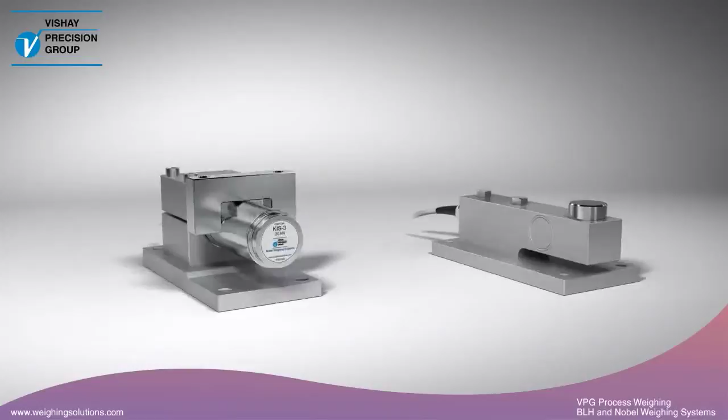The shear force strain gauge load cell has become the main component in most industrial vessel weighing systems. Understandably, these simple devices are often regarded as commodity items, with little to differentiate one from another. However, a different story lies behind the spec sheet information. This presentation explains why.

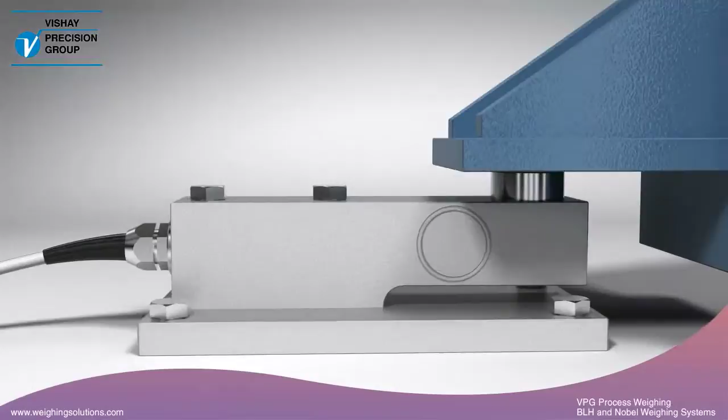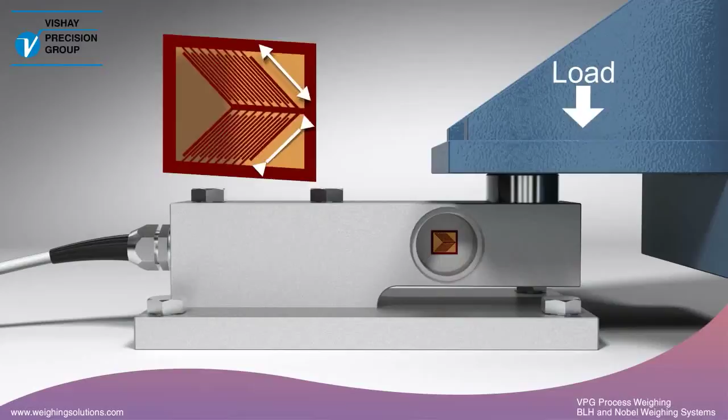Simple shear force load cells were developed for use in weighing platforms and have strain gauges bonded to a web located inside a cavity. There are usually 4 strain gauges, 2 seen here and 2 mounted on the far side. They are stretched or compressed as the web is sheared by the load. The gauges are designed to measure the shear strains in the web.

In a simple shear beam, there are also bending strains present, which contribute to the output. Under laboratory conditions, the bending effects, though present, are small in comparison to the applied load, and thus do not adversely affect the accuracy of the load cell.

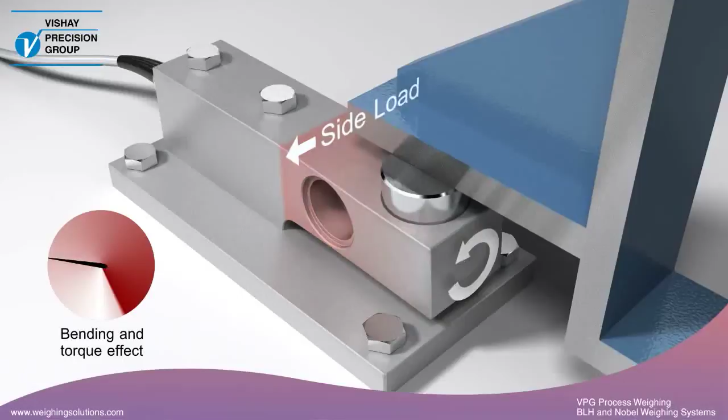In a real process weighing application, however, the bending effects can change unpredictably due to thermal or structural movement. These additional strains result in measurement errors. The side loads can be in any direction, caused by agitation, wind loads, or the flexing of structural supports and piping connections. In addition to bending errors, the load cell is now subject to twisting forces, which result in additional torque errors. Simple shear force load cells work well in ideal conditions, and most have excellent specifications on paper.

BLH and Nobel Weighing Systems, brands of VPG process weighing, invented a unique load cell that continues to deliver great performance even when conditions are far from ideal. We call it the KIS load cell.

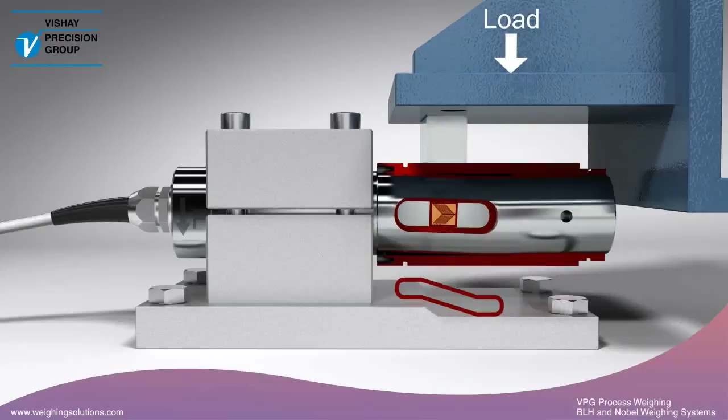The KIS load cell has a circular and symmetrical measuring element. It also has a sleeve which fits concentrically over the measuring element. This sleeve is the key to the KIS principle and was patented by BLH and Nobel Weighing Systems. It allows the loads to be applied in line with the strain gauges. The measuring element deforms symmetrically, leaving the strain gauges unaffected by bending moment errors.

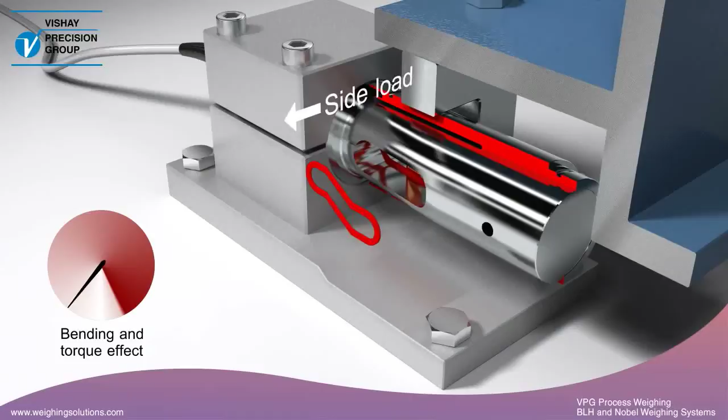The beam behaves in a similar way when subjected to side loads. This enables the transducer to reject errors caused by thermal or structural movement. Side loads that arise in the transverse direction due to agitation, wind, or structural deflections are similarly rejected. Even under 100% side load conditions, the measuring element maintains its symmetrical form, and the weight measurement remains accurate and stable.

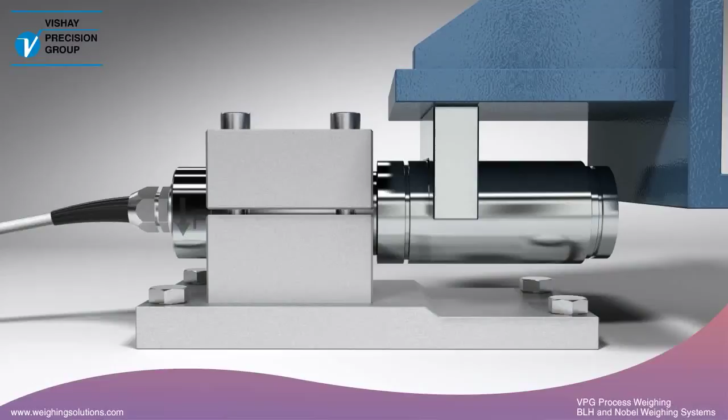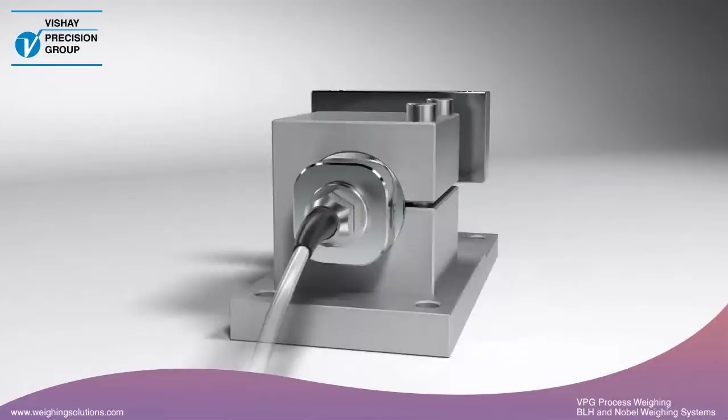The KIS beam delivers measuring accuracy in the field where other load cells fail to measure up, not just in the laboratory. The KIS beam has a high specification on the datasheet, but much more important, it lives up to the specification in the real world.

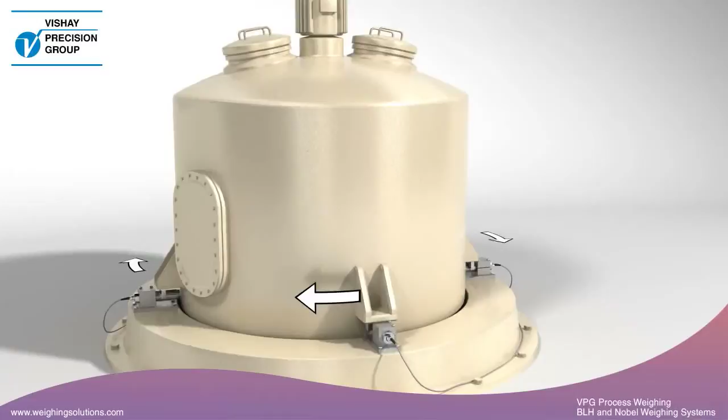The KIS load cell has several features that clearly distinguish it from other load cells. These features make it very easy to install and extremely accurate, even when subjected to disturbing forces and severe environmental conditions. Thus, the KIS load cell is perfect for applications involving thermal expansion, structural movement, vibration, or twisting. Batching with heating or agitation are typical applications where the KIS load cell delivers.

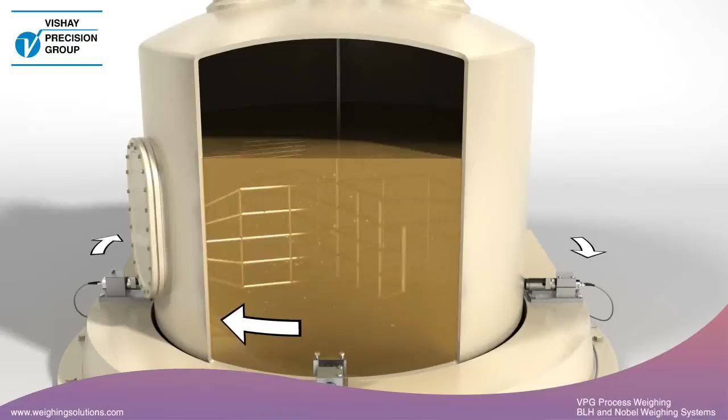Agitation or movement from the use of mixers is a common problem. The KIS load cell withstands very high lateral forces and delivers accurate weighing even under these conditions.

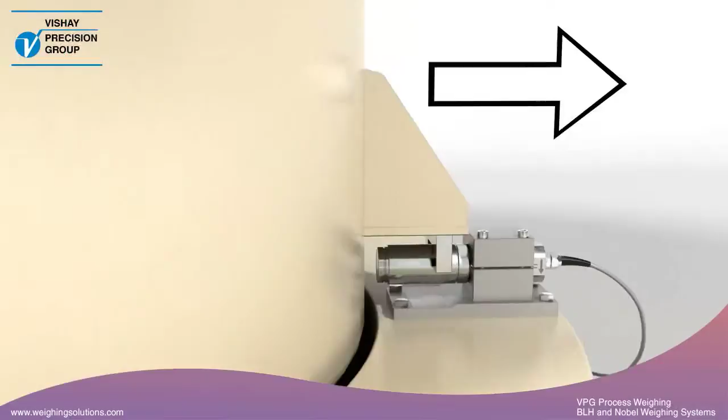Heating of the medium in a vessel can cause thermal expansion, but the design of the KIS load cell allows for movement of the loading point. The load cell will deliver accurate weighing in accordance with the datasheet specifications, even when heating from the process itself or a change in ambient temperature causes thermal expansion.

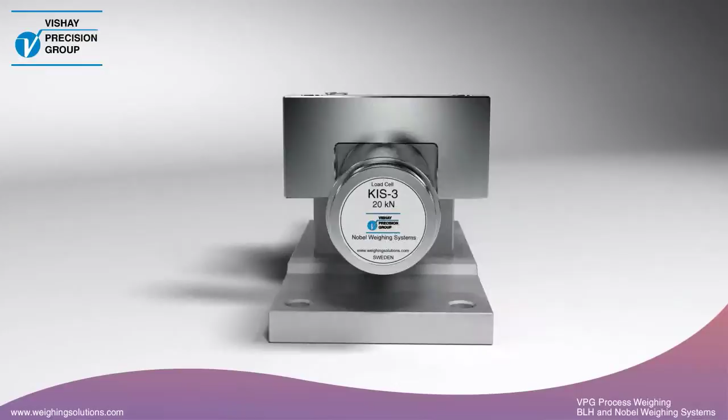The clean surface and minimum mechanical mounting, together with its unique design, make the KIS load cell perfect for working with harsh chemicals, such as corrosive acids, harsh industrial detergents, caustic vapors, and granulate powders.

The KIS load cell has been a high-performing component in the food, chemical, offshore, mining and petrochemical industries for more than 40 years. Its unique features are improving precision in batching, tank weighing, web tension and many other applications around the world. The KIS beam lives up to specifications in the real world.